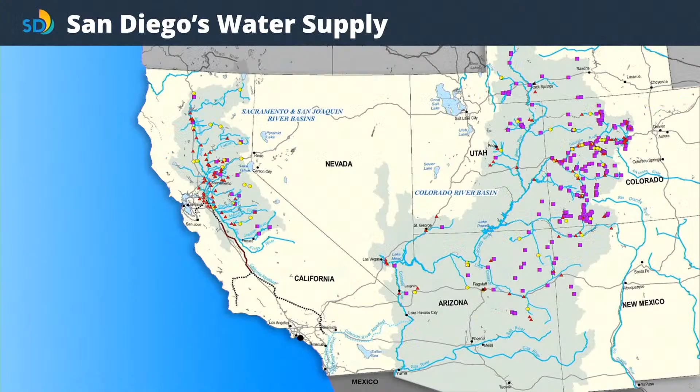I'm Michael Valori with the City of San Diego and Pure Water, and I'm just going to jump right into the presentation. Bear with me in case it's a little clunky. I'm not too familiar, I might ask Marissa for help with the technology. Okay, thanks, yeah, that's it, you just hit that side of the thing. I think the space bar should work too. All right, I just wanted to give her a good moment to shine. So yeah, thank you, all right everyone.

We start with this slide because it's one of the most important things we want everyone here to leave with thinking about: this idea of reusing water, water that's been used by others, whether it's industry, municipalities, or tribes on the reservations—we use it again. As you see here, we get water from the north, from the Colorado River and also from the Sacramento River Basin.

These areas are where rain collects and drains all the way down to San Diego, all the way at the south, where that water drop is.

Throughout that journey, both of these streams collect water from all those purple, yellow, and red spots. Those are all agencies and cities and villages and other people. So this idea of reusing water that was used for centuries and millennia is, time and time again, not new.

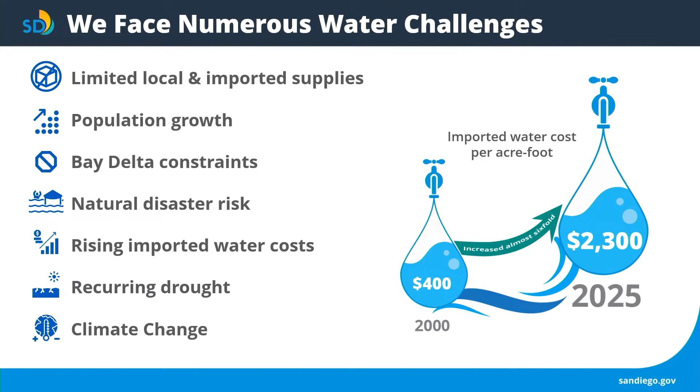With water in mind, another thing you've probably heard a little bit about is desalinization. That's using ocean water. It's a great idea, it's a great big source. It's also very, very hard to do and very costly. That water is salty, incredibly salty, and the equipment takes a beating.

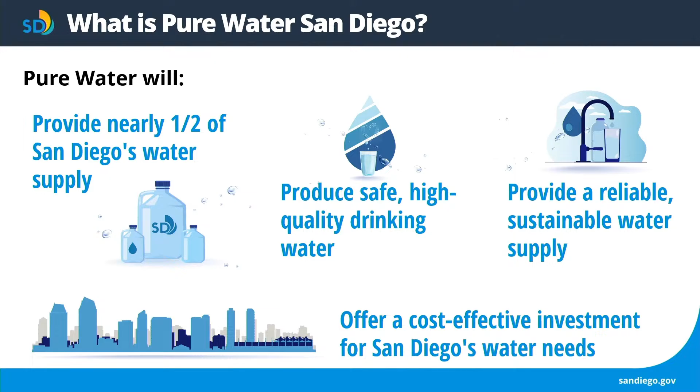And most importantly, offer a cost-effective investment for San Diego's water, whether it be potable use, industrial, or agricultural. It's going to be a cost-effective method. We can't keep relying on those upstream retailers - you saw how much the water increased over the past 20 years. It's not sustainable.

We send it to the drinking water plant, treat it, and then it comes to us here at the faucets, our toilets. Once treated, we send it just to the ocean. It's treated to a safe level, and sent back out, but we don't get it back, we don't benefit from it, and that's it.

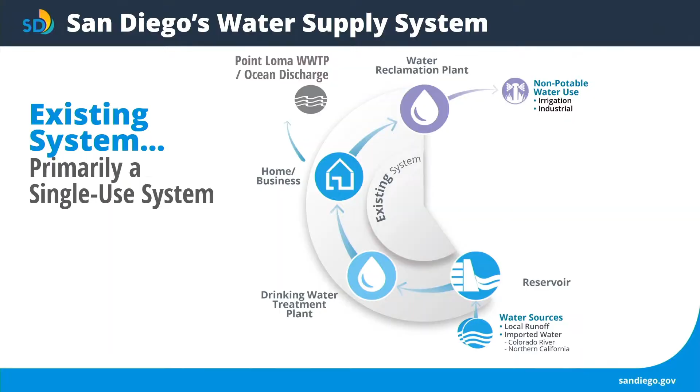Also, one thing I mentioned last is the purple pipe, that's water reclamation. We're doing a little bit of recycling currently. But what Pure Water is going to do is close the system. So instead of taking more water from the bottom sources and sending more out to Point Loma and the ocean, we're going to cut off those two a little bit and keep it running inside, basically a closed cycle. So instead of draining to the ocean, we're going to use it again, after treating it to incredibly healthy levels.

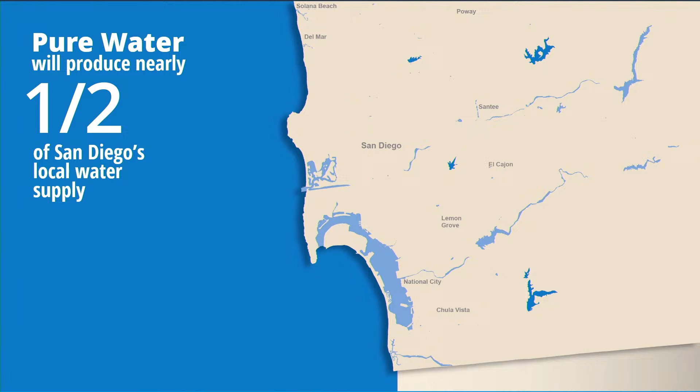That's the Pure Water facility, and we're going to talk a little bit more about that now. As I mentioned in one of the previous slides, San Diego Pure Water will produce half of the local water supply.

Right now we're finishing up, well we still have a year or two, but as far as it's come we consider it finishing up Phase 1. You can see this shows Phase 1. Roy's going to talk a little bit more about these locations, but we take water from Morena Pump Station, send it up to North City Water Reclamation and Pure Water Facility, and then it goes to Miramar Reservoir. So if you remember the past slide with the reservoir where it starts, this is actually where, if you think about it, we're starting back again.

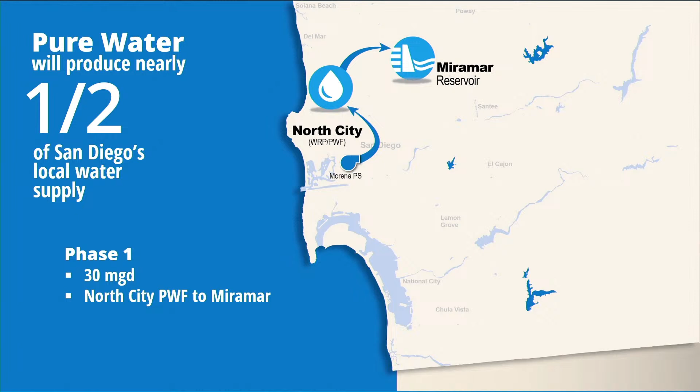Phase 1 is going to produce 30 million gallons per day. I know that number doesn't mean so much, but it's a big number, it's a lot of water.

And now I'm going to show a presentation, a video of the demonstration facility. Instead of going there, we like to show this video. I think it's about 10 minutes, and it's also available on YouTube if anyone wants to send this out to friends or family.

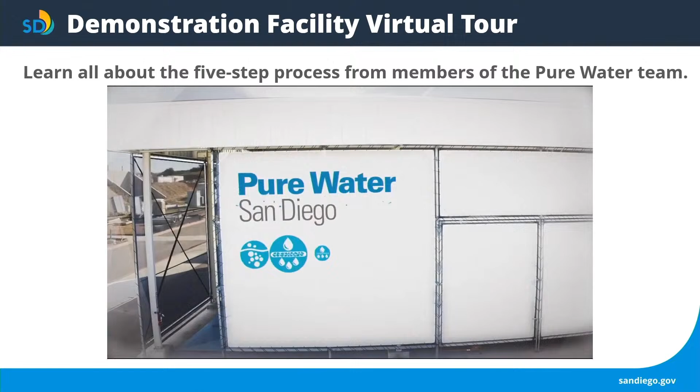Welcome to the City of San Diego's Pure Water Demonstration Facility. This facility is a key element of the San Diego Pure Water Program, which will provide half of the city's water supply by 2035. The Pure Water Demonstration Facility uses advanced technology to treat recycled water to meet drinking water standards.

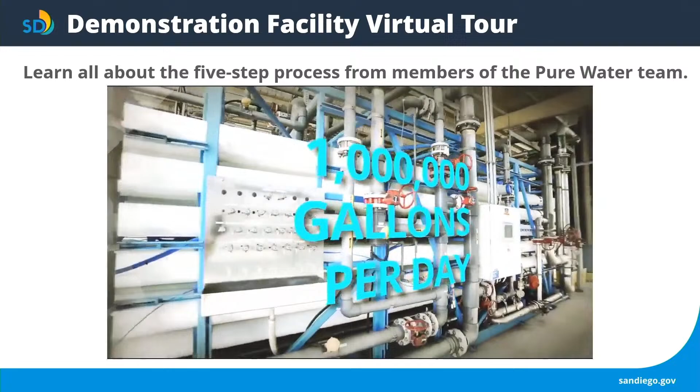This facility, here since 2011, has produced over 1 million gallons per day of purified water that is used for monitoring and testing. The results of this testing, combined with input from scientists, health experts, and outside laboratories, has shown that it is a safe new water supply for the City of San Diego.

We're pleased to have you join our engineers, operators, and other staff associated with the Pure Water Program on your virtual tour of these facilities today. Phase 1 of the Pure Water program, which includes a full-size treatment facility, pipelines, and pump stations, has been designed and construction is well underway.

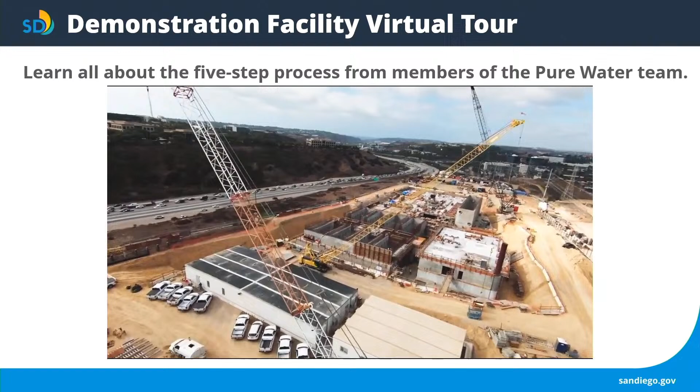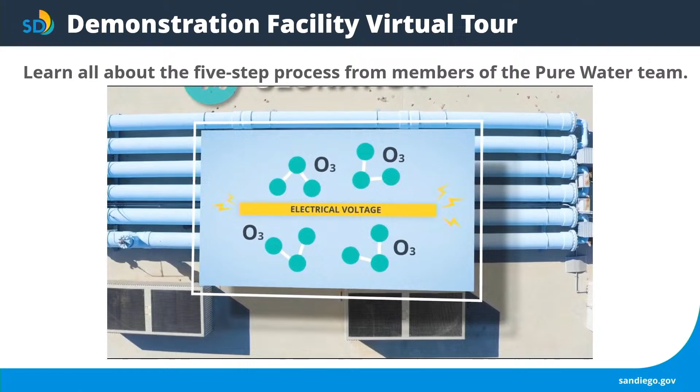The first step of San Diego's water purification process is called ozonation. Ozone gas is a powerful oxidant and is generated here on site by subjecting oxygen molecules to a high electrical voltage, converting O2 to O3. That's done by specialized equipment that's inside of the white metal container back there.

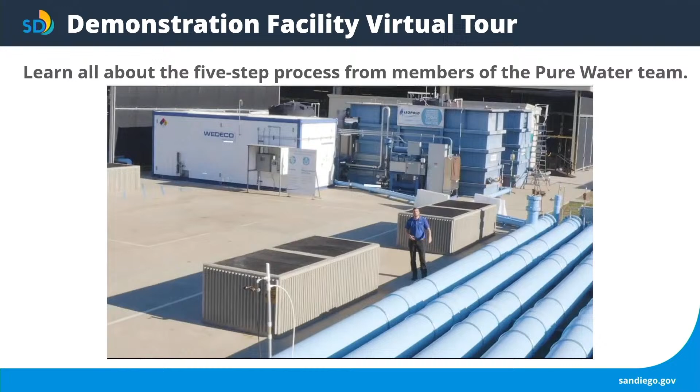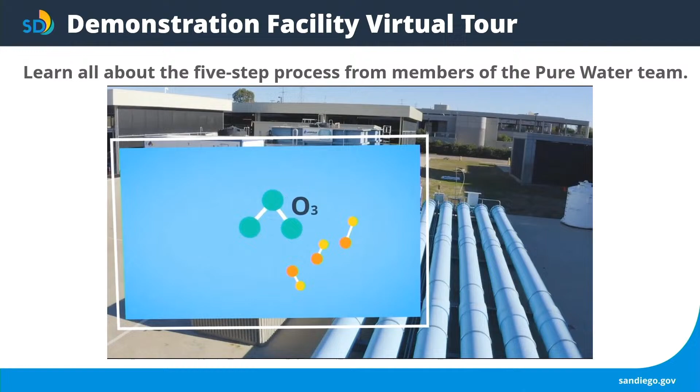That gas is then infused in the water and carries through a series of blue pipes called the ozone contactors. The contactors provide time in which ozone can react with constituents in the water. Ozone is very reactive and it'll break down pathogens that cause us harm by destroying their outer cell walls. It can also break down other smaller molecules to more basic forms. It takes about 8 minutes for the water to pass through this process.

The second step is the biological activated carbon filters. By the time the water reaches the filters here, all the ozone in it will have either been consumed or broken down to O2, its more stable form.

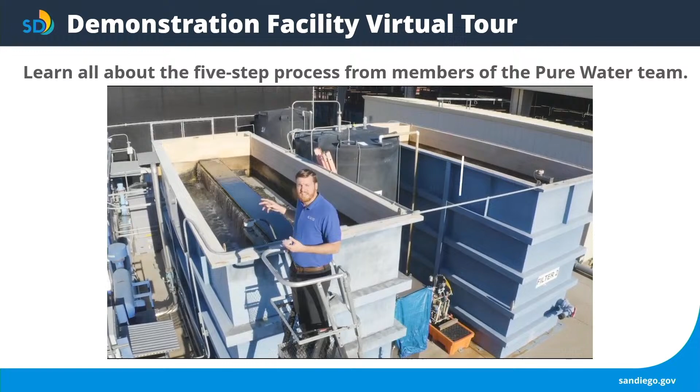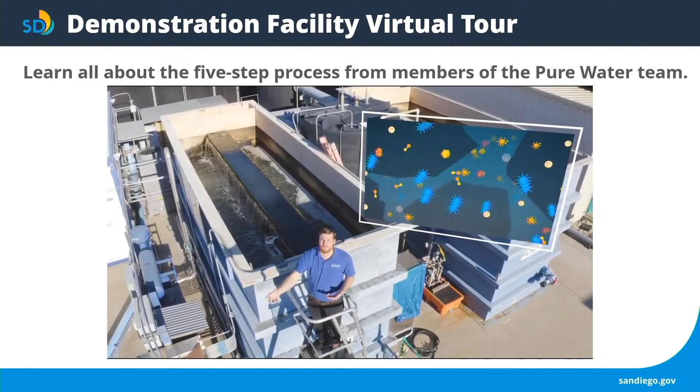Inside of the filters is a media just teeming with beneficial bacteria. These bacteria consume the organics that were broken down by the ozone process. We get about 30 to 50% removal of organic matter from this process. The beneficial bacteria are then removed at the next step along with anything else that gets through the filter.

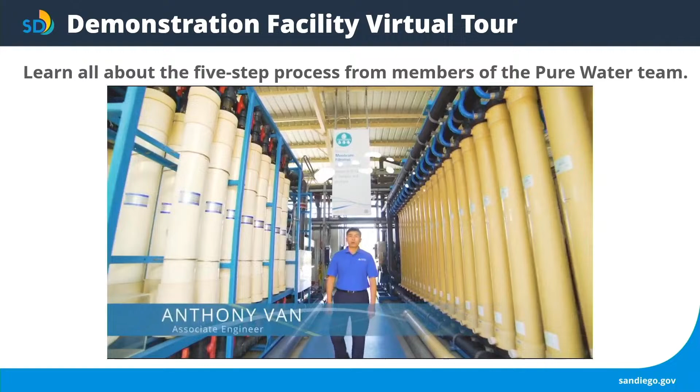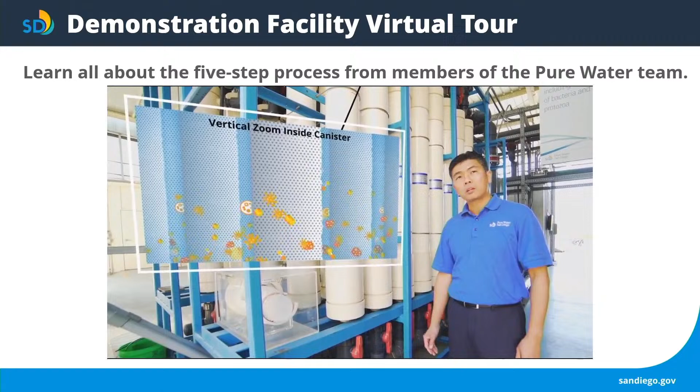And here we are at the third barrier of the water purification process. It's called membrane filtration. At this stage, recycled water is pushed by high pressure pumps through filtration membranes made up of thousands of hollow fibers. These fibers have very fine pores that filter out particles, bacteria, and protozoa in the water.

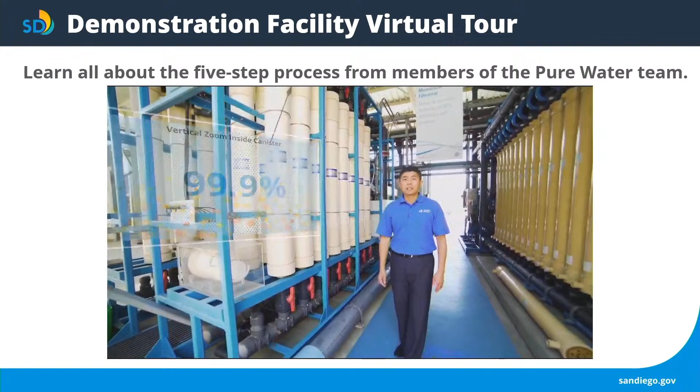99.9% of the particles cannot pass through this process. We're testing two types of membranes. On the left is the ultrafiltration. On the right is the microfiltration.

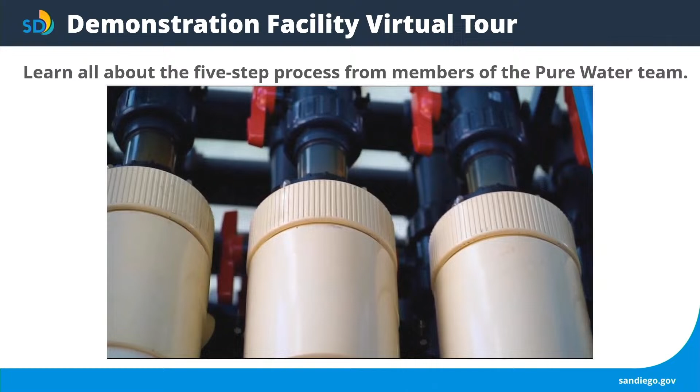The difference between these two types of membrane is that ultrafiltration takes out additional organic matter, but it also operates at high pressure and requires more energy to do so. 1 million gallons per day of water passes through these two equipments. 500,000 goes to the ultrafiltration and the other half goes to the microfiltration.

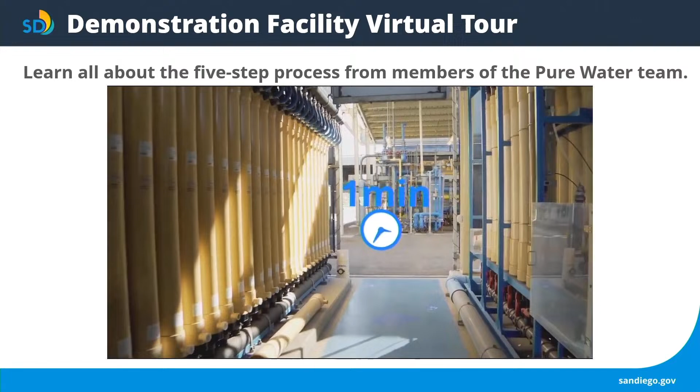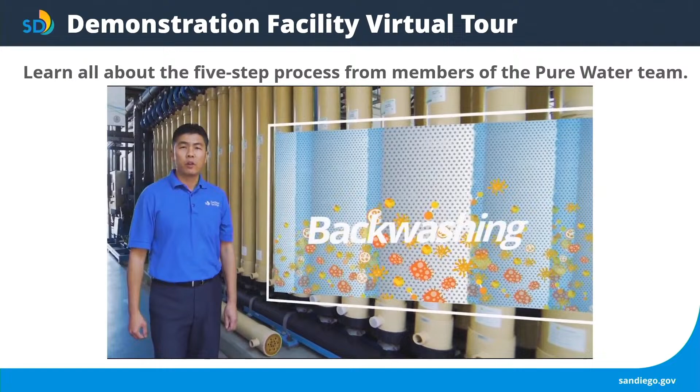All membranes are tested and monitored daily to confirm the integrity of the membrane filters. It only takes 1 minute for water to pass through these membranes. To prevent particle buildup on the membrane fibers, a process called backwashing occurs every 30 minutes. Backwashing reverses the flow of water and uses air scouring to shake off any particle buildup on the membrane fibers.

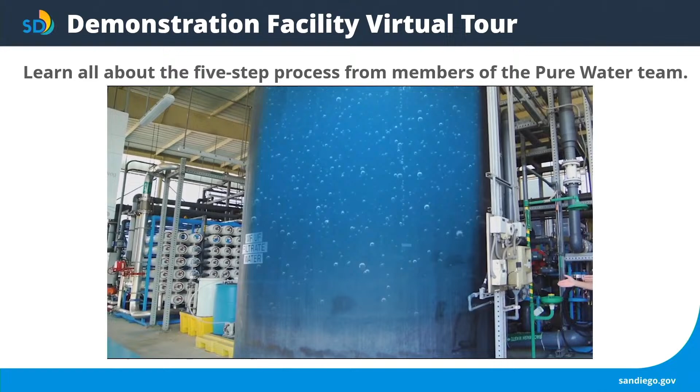As the water gets processed through the membrane filtrations, it comes together here at this 15,000 gallon storage tank where it is ready to get processed and move on to the next barrier, called reverse osmosis.

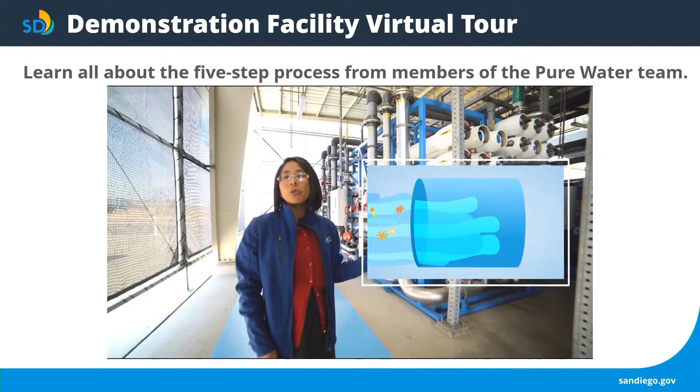Okay, now for reverse osmosis. So reverse osmosis is an extremely powerful treatment technology. It's able to remove 99.9% of what remains in the water after it's already gone through the 3 steps you've already seen. And we are actually testing 2 types, 2 configurations, and 2 manufacturers.

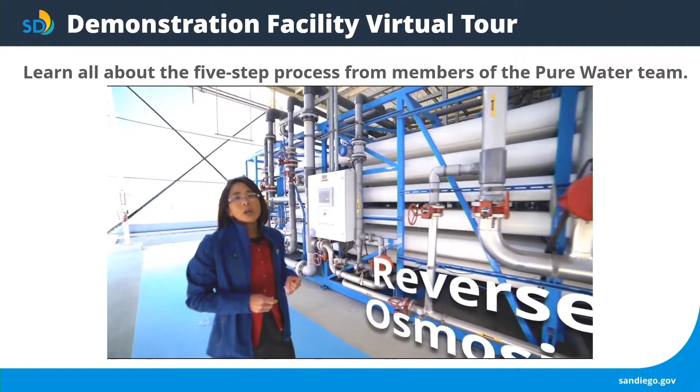The reason we did this is we wanted to be able to compare the performance of the membranes, how much removal we're able to get, and also be able to measure the energy consumption since this is an intensive treatment step.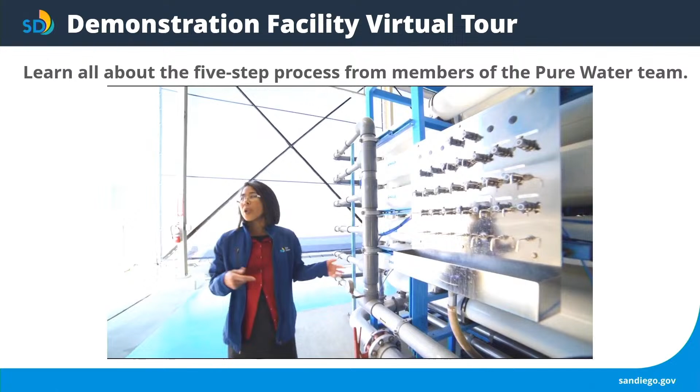Similar to the membrane filters and the other processes you've already seen, we're constantly monitoring the water as it enters and exits the RO membranes. We want to make sure that we're getting the removal of the dissolved salts and the dissolved organic compounds that we expect.

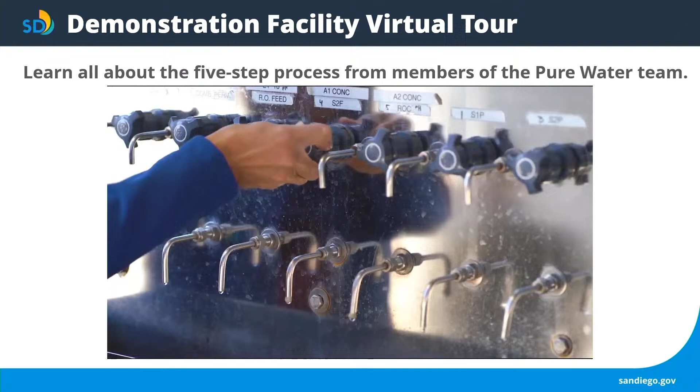The way we do that, our operators pull samples from ports like these throughout the day. Each one of these is plumbed to an individual canister of membranes. So we take the water and test it for temperature, electric conductivity, and other parameters just to make sure that the membranes are working properly. So if you follow me around the corner, we'll show you what they look like.

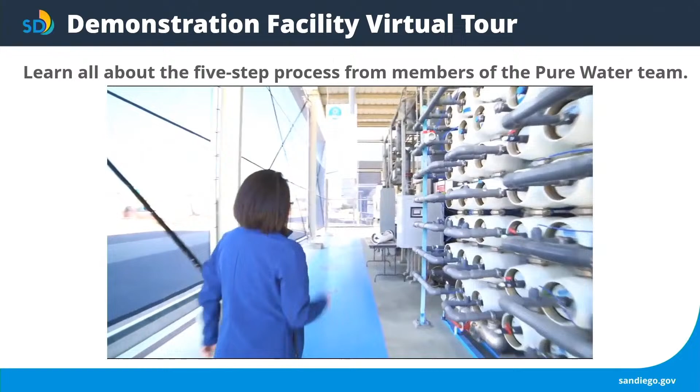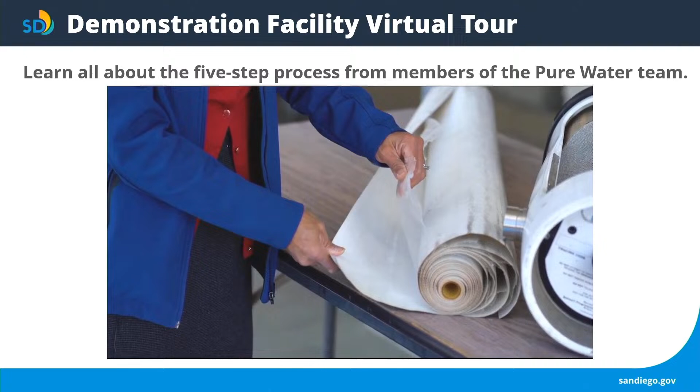So the membranes are actually these plastic sheets, and they're rolled in consecutive layers similar to a roll of paper towels. So you have the membrane, and in between you have this netting. It acts as a spacer. And so how it works is it's tightly wound.

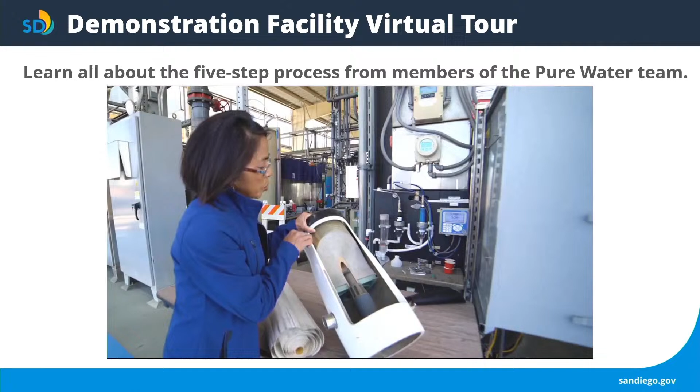The water is forced under pressure on the outside of the canister, and it makes its way through each layer of the membrane. The dissolved salts and organic compounds that we want to remove from the water get trapped in between the sheets, and they're forced out the ends of the canister. They're not allowed to continue on in the process, so all that makes it through is the filtered water that gets to the center of the membrane, and this is what goes on to the next step in the process. And there you have it - that's reverse osmosis.

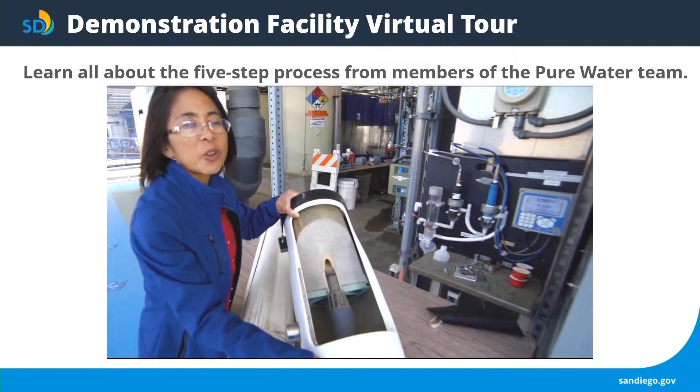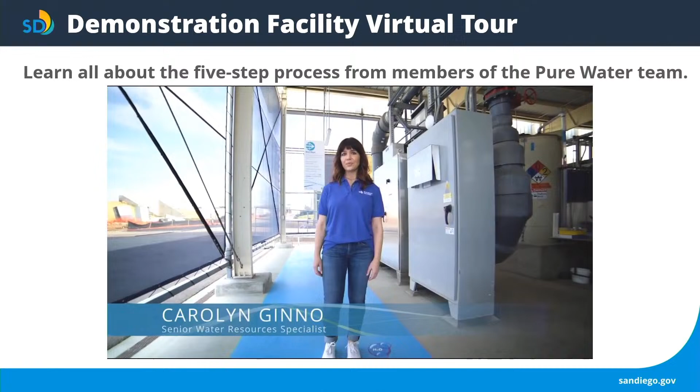We are now at the fifth and final barrier of Pure Water Demonstration Facility, Advanced Oxidation with Ultraviolet Light. When the water leaves the reverse osmosis units, a powerful disinfectant is injected into it. This unit right here produces ultraviolet light, which is similar to extremely concentrated sunlight. There's actually 72 bulbs just like this wound up inside of the unit. When that ultraviolet light hits that disinfectant, powerful reactive molecules are formed, which actually destroy any matter that happens to be left in the water at that point.

It's so powerful and so fast that in just 1 second, 99.9999% of all protozoa, bacteria, and viruses are all destroyed. This process also helps to ensure that no new matter is formed in the water going forward. And after this step is finished, we have purified water.

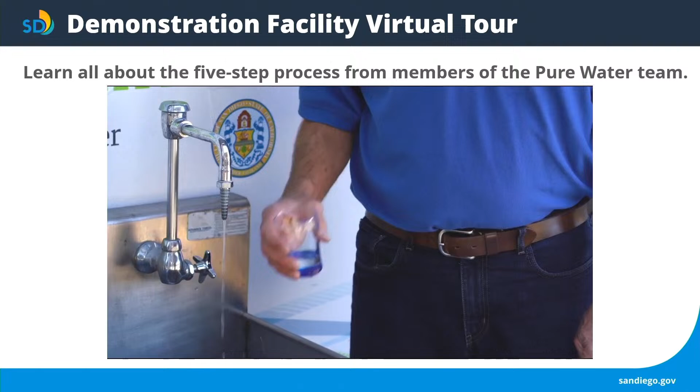Now that the water has gone through the 5 treatment steps that you've seen, the water is pure and distilled water quality. The water produced at this 1 million gallon per day demonstration facility is tested to ensure that it meets all drinking water standards. As you can see, the water is pure, just as pure as the water that comes from the tap in your home. In fact, it's so pure that we'll have to add minerals back into the water before we pipe it to Miramar Reservoir.

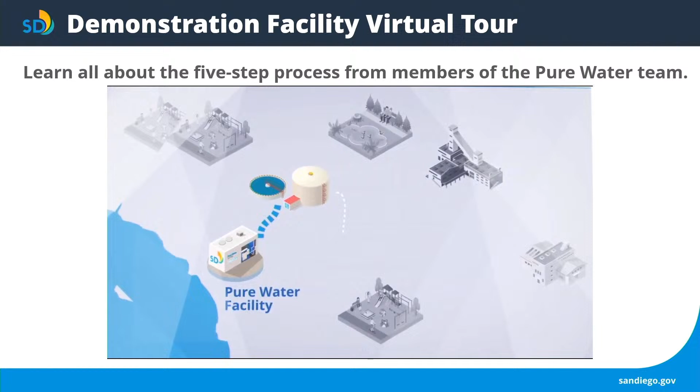The water produced here at the demonstration facility is being returned to the recycled water system for irrigation and industrial uses. Phase 1 of the Pure Water program will construct a 30 million gallon per day full-scale facility, 30 times larger, that will use the same technology that you saw here in the demonstration facility.

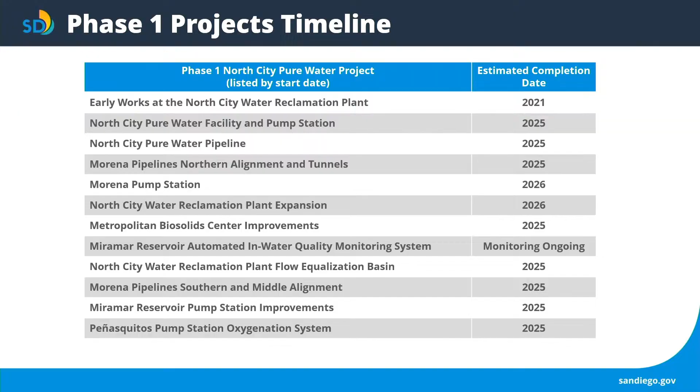I'm not going to get into too much detail about the timeline here. This is an overview of the 12 major projects that are under construction as part of Pure Water Phase 1. A number of these projects started construction as early as 2019 and 2020. As you can see from the estimated completion date, most of them are set to be completed later this year, with some other major projects set to be finished in construction next year. So as far as Phase 1 goes, we were pretty far along in construction. We can see the light at the end of the tunnel now.

We're almost complete. And just to give you guys an idea of scale of these projects, we have some construction projects that are as small as $1 million for construction and some as large as $350 million in construction. In total, the Phase 1 program estimated cost is about $1.5 billion to design and construct and to deliver.

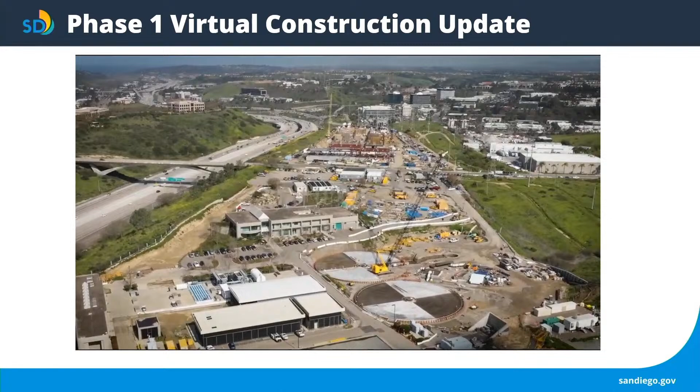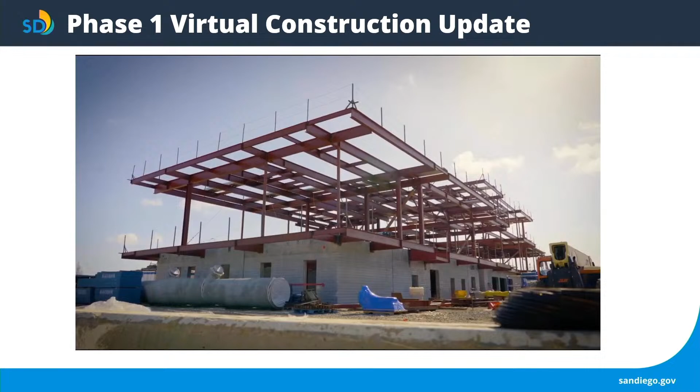Pure Water San Diego is the city's largest infrastructure project to date, and we're making tremendous progress on the construction of Phase 1, which will deliver 30 million gallons of water a day. The program offers a cost-effective investment for San Diego's water needs and will provide reliable, sustainable water supply for generations to come.

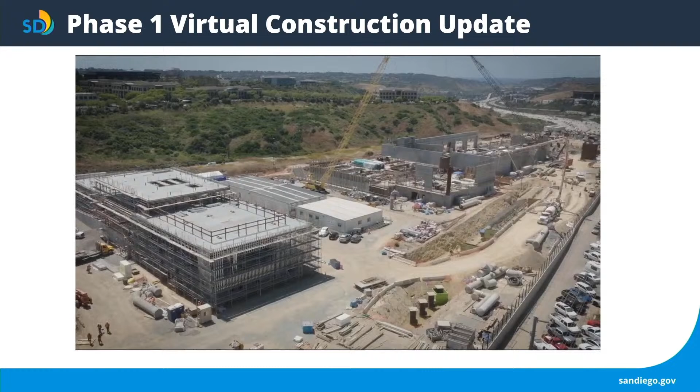Pure Water Phase 1 includes 10 major interconnected projects in the Morena, Bay Park, Clairemont, University City, Miramar, and Scripps Ranch communities, and construction's underway or completed on all the projects. To fund Phase 1, the city has been diligent and tireless in pursuing and securing as much federal and state funding as possible. To date, the city has received more than $1.4 billion in low-interest loans and $81.5 million in grants. Here's an overview of the Phase 1 projects.

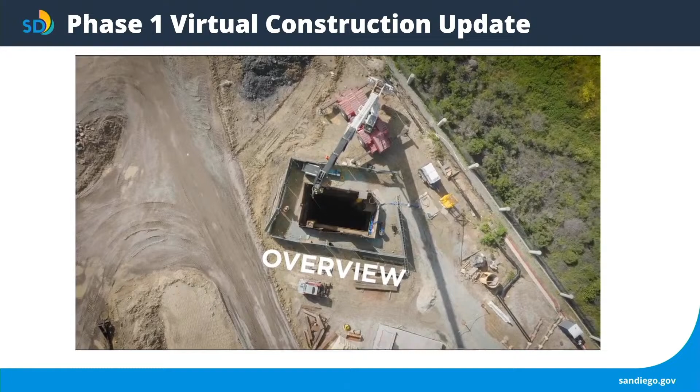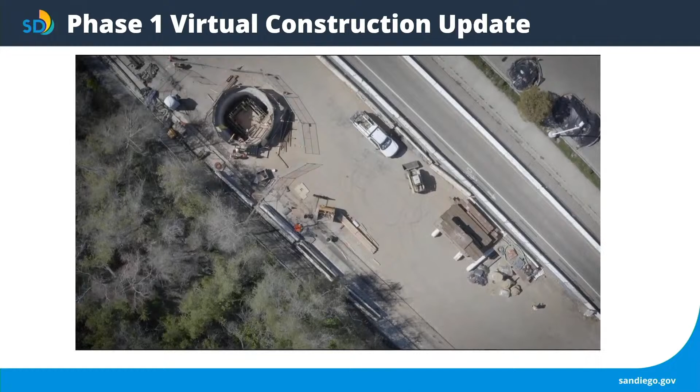Starting from the southern end, the Morena Pump Station will divert an average of 32 million gallons per day of wastewater from the existing system that runs under Friars Road. In addition to the pump station under construction at Sherman and Custer Streets, this project also includes a diversion structure and a junction structure under Friars Road.

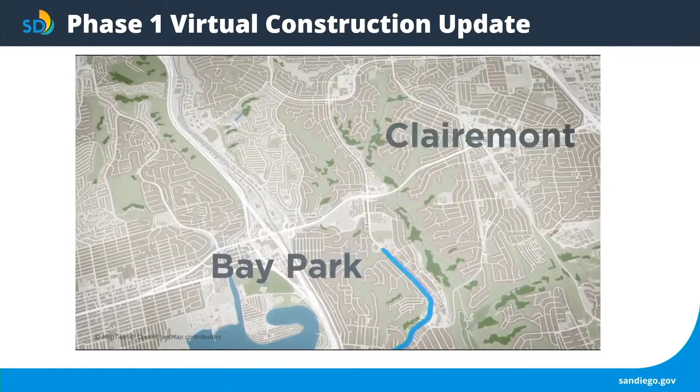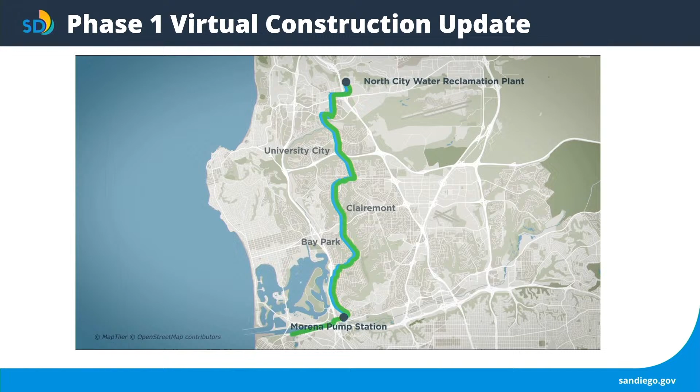Once wastewater is diverted from the Morena Pump Station, it will travel through a 10.5-mile wastewater pipeline through Bay Park, Clairemont, and University City. The facility projects will be connected by 2 pipelines under construction: one to carry wastewater to the North City Water Reclamation Plant, and the other to carry the byproduct, or the remaining product from the water, to the Point Loma Wastewater Treatment Plant.

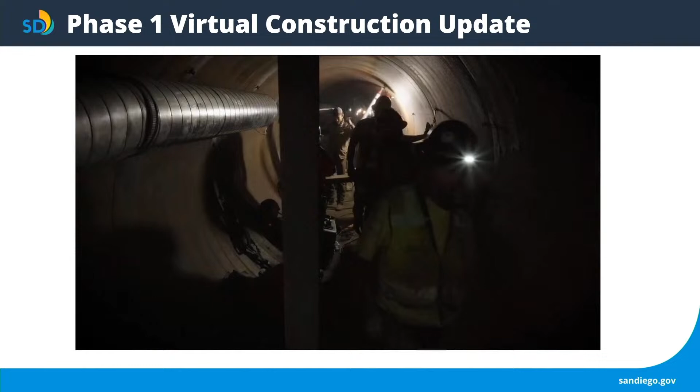Projects of this scale involve technical construction and high-tech equipment that requires experienced operators. While most of the construction will include trenched installation, tunneling with specialized machines will be completed in 3 areas, including under Interstate 805 to connect the pipelines with the existing North City Water Reclamation Plant.

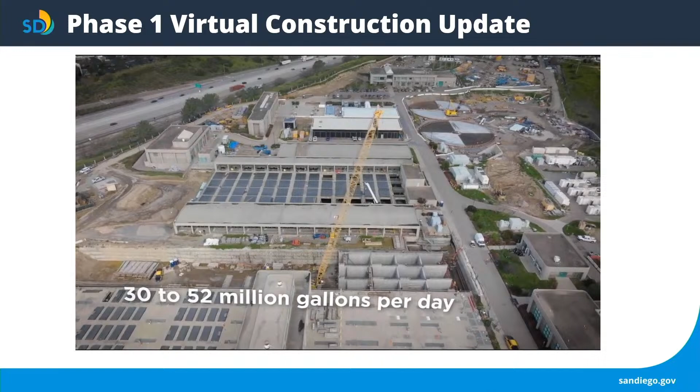The wastewater will be cleaned to recycled water standards at the North City Water Reclamation Plant on Eastgate Mall, which is currently being significantly expanded from 30 million gallons per day to 52 million gallons per day. The recycled water will then be transported across the street to the North City Pure Water Facility, where it will go through a rigorous 5-step purification process.

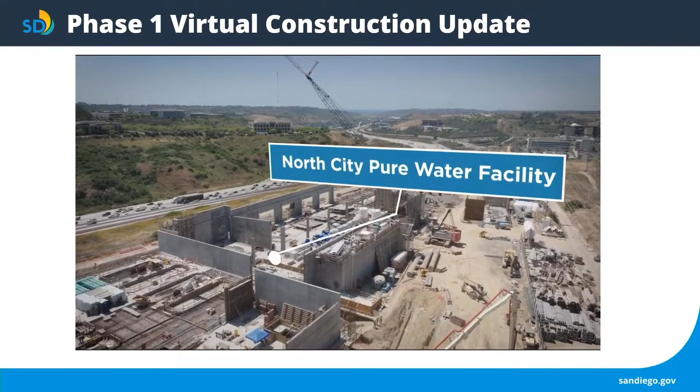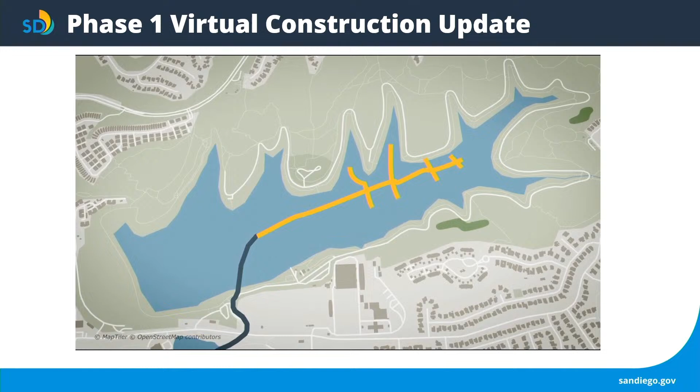Once the high-quality purified water leaves the Pure Water Facility, it travels to Miramar Road eastward through an 8-mile pipeline under Interstate 15 and into Scripps Ranch, where the purified water will pass through a dechlorination facility in preparation for storage in Miramar Reservoir. The purified water will enter the reservoir through a 1-mile branched underwater pipeline and mix with water in Miramar Reservoir.

This pipeline will be submerged and installed by divers. As with all our City of San Diego drinking water supplies, purified water in the Miramar Reservoir will be further treated at the nearby Miramar Water Treatment Plant before we deliver it to our customers in the northern part of the city. Now let's go check out the construction at the North City Pure Water Facility.

Welcome to the brain of the Pure Water Phase 1 project, the North City Pure Water Facility. This is the largest of all major Phase 1 projects with an estimated cost of $365 million. Behind me, the construction crews are making progress on concrete above-ground walls and other structural components of the purification process building and the structural steel framework of the operation and maintenance building.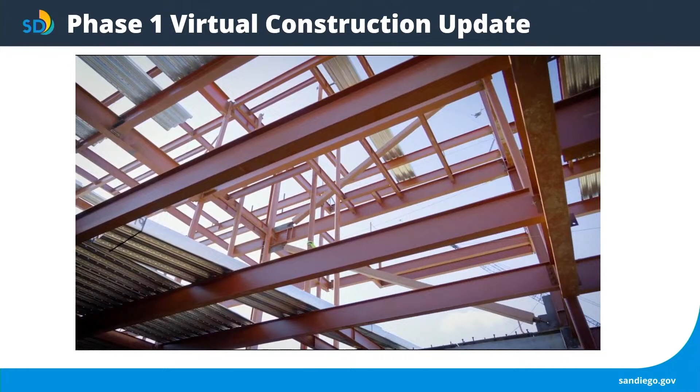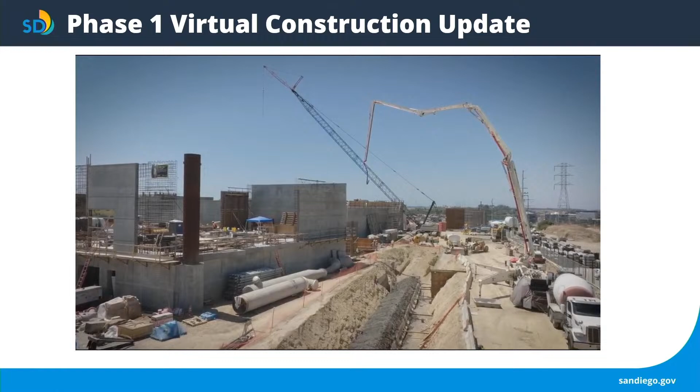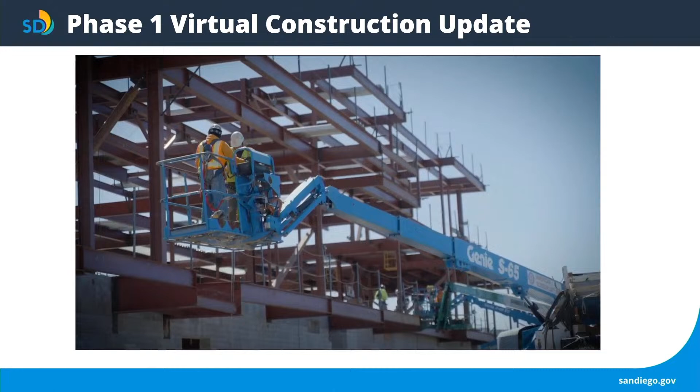Nearby, construction is underway on pump station and 4 pipelines that will connect the North City Water Reclamation Plant with the Pure Water Facility. Construction started April 2021, and most of the foundation and underground work, like piping and duct banks, is already complete. In addition to the water purification process buildings, this facility will also feature a new LEED Silver certified 33,000 square foot operations and maintenance building with workspace and a discovery center for the community to learn more about Pure Water San Diego and a sustainable water future.

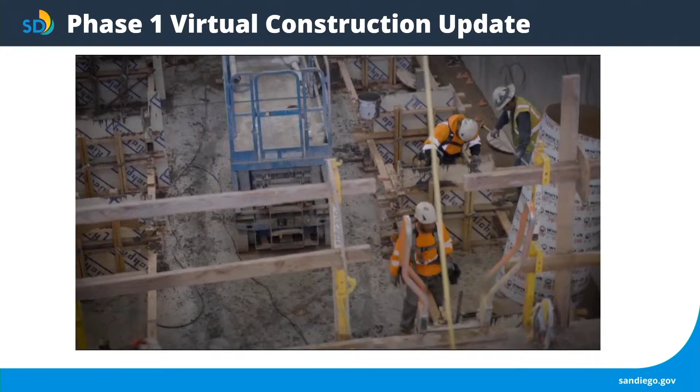Let's look at construction from above on the 5-step purification process. Here's the ozone building. Right now, crews are working on structural components like the upper level walls, mechanical components like plumbing, and electrical conduit installation. Underneath, the water goes through the ozone contactor. As you can see, the walls are complete and crews are working on the lighting conduits.

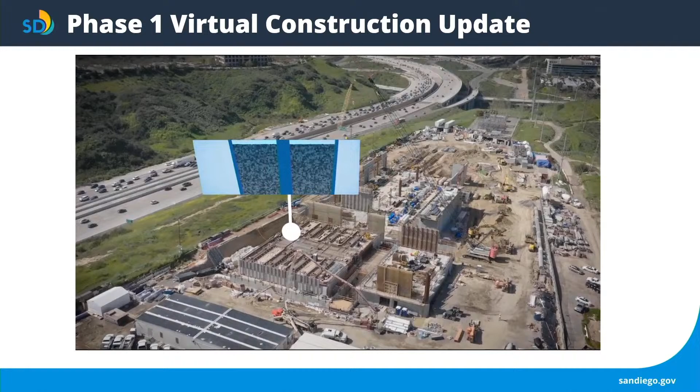The water then passes through the biological activated carbon filters, or BAC. Here at the BAC system area, crews are working on stairs, walls, and roof deck rebar installation. Next, the water goes to the membrane filtration feed tank, where crews are working on the tank structure and decking.

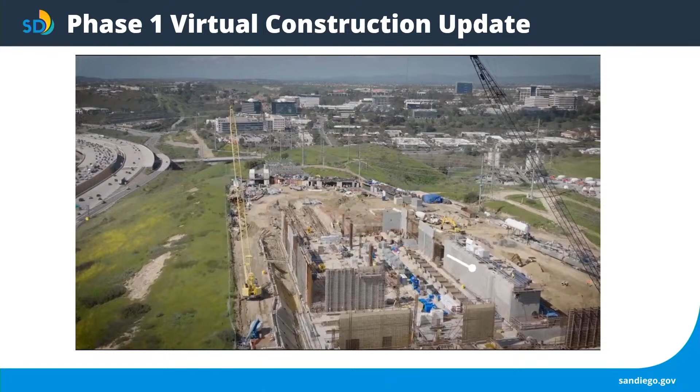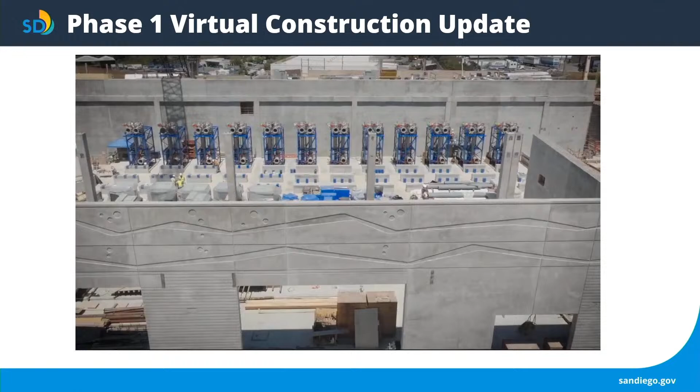Here you can see the multi-level process building that will eventually house the membrane filtration and reverse osmosis equipment. Crews are working on pipe installation throughout the basement level and walls on the ground level. This is also where the water will undergo UV light and advanced oxidation, the last step in the purification process.

As you can see, North City Pure Water Facility includes many different areas under construction simultaneously, all tightly orchestrated on this 10.5-acre site. The crews are what makes it happen here. Creating local jobs and putting San Diegans to work is a vital part of Pure Water San Diego. As of March 2023, program-wide, there are an estimated 2,022 people working on all the projects.

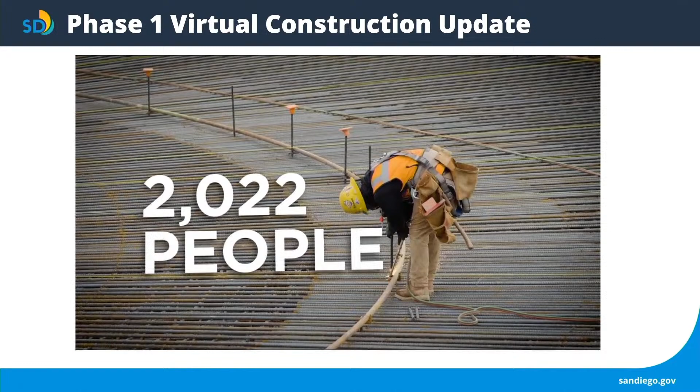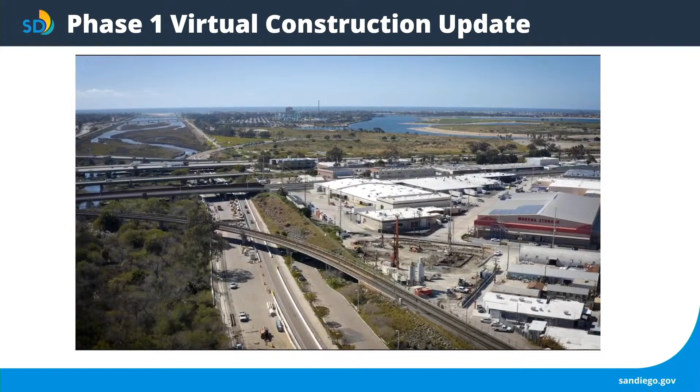1,330 of these are Pure Water San Diego construction workers that live in San Diego County, and 466 people that live within the City of San Diego. On this construction site alone, there are between 75 and 120 craft trade personnel working daily. We look forward to completing the Pure Water San Diego Phase 1 projects and making pure water a reality for generations of San Diegans through a local, drought-resilient water supply.

All right, I have some additional construction photos to show you all. This photo behind me is some of the open trench construction work that's being done as part of the Morena Conveyance South and Middle project. So this is the wastewater pipeline that's going to convey wastewater from Morena Pump Station up to the North City Water Reclamation Plant. This is some of the trenching work that the contractor was doing.

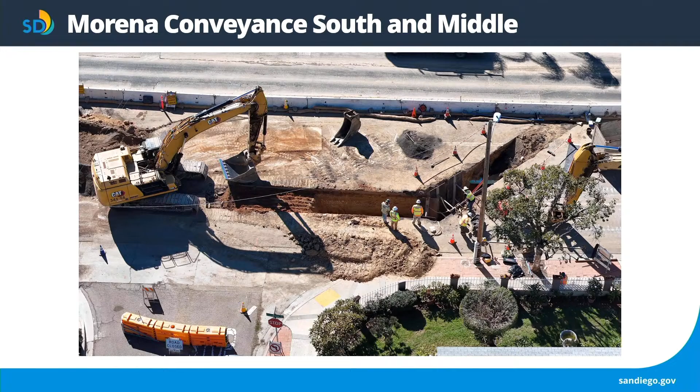You can see the footprint and sort of scale of construction. If you have been impacted by some of the traffic lane closures during construction, this is sort of the reason why. The equipment is very large, the trenching is deep and wide as well, and it's a large operation.

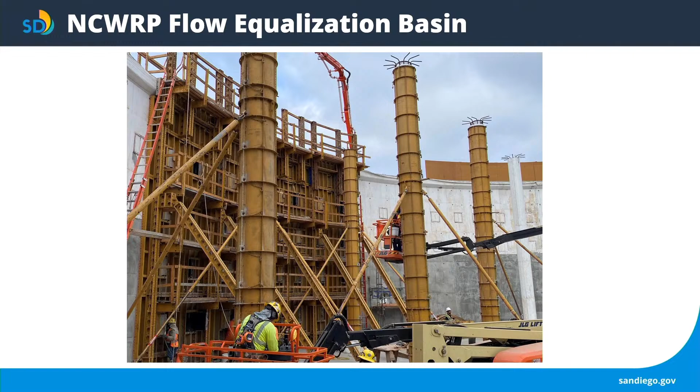Here we have a photo of the construction of an additional flow equalization basin at the North City Water Reclamation Plant. The flow equalization basin helps regulate the flow going into the treatment plant. Ideally, we'd like a continuous, steady flow rate. During high flow periods, the equalization basin fills up and stores the wastewater. During low flow periods, it drains out and adds additional flow to the treatment plant. This is necessary to ensure the treatment processes at the plant are functioning as they're supposed to.

And here's the Pure Water facility. You all saw that video previously showing a lot of the construction progress. This is a more recent aerial photo, the one on the right. Starting at the front is the very large operations and maintenance building and Discovery Center, which after construction is completed will be open to the public. There will be educational components and other exhibits to help the public learn more about the facility.

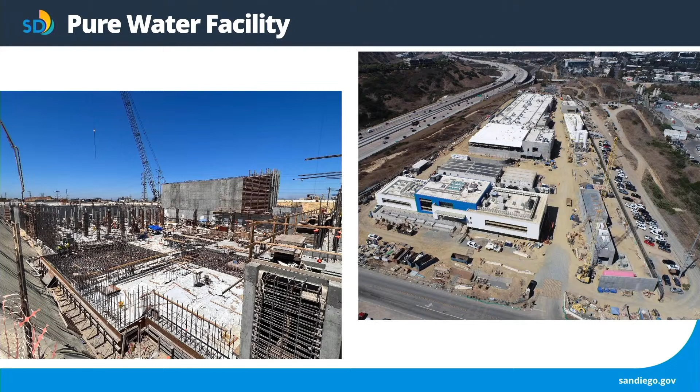Because the pipeline is empty as they pull it out, it floats. But as they pull it out onto the reservoir, they slowly fill it with water, and then it sinks. It's called an S-bend because it sinks from one end, forms an S shape, and slowly sinks down to the bottom. This pipeline has already been constructed. It's already at the bottom of Miramar Reservoir. This portion of construction is already complete.

Here we have the Miramar Reservoir Pump Station Improvements Project. If you've ever been to Miramar Reservoir, as you're walking around the loop, if you look down to the south past the dam, you can actually see these pumps there. These are the intake pumps for the treatment plant. They pull water from Miramar Reservoir and pump it into Miramar Water Treatment Plant so it has enough pressure to flow through the treatment plant for treatment.

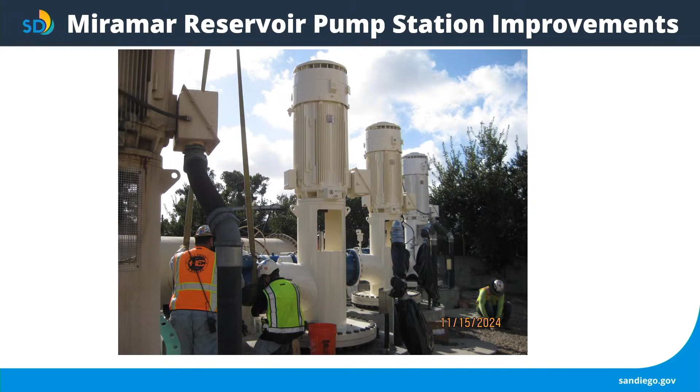Mike mentioned earlier that we're currently in the process of planning for Phase 2. Mike and I are working on Phase 2 planning components currently. We are looking at different options for where to place the Phase 2 facilities. We know it's going to be in the central area, but as far as where the treatment plant will be sited specifically, and where the purified water will be conveyed to, whether Lake Murray, San Vicente Reservoir, or a combination of the two, that hasn't yet been determined. We are looking at studies involving water balance between the reservoirs, water quality, and ease of operation. There are a lot of components we're currently looking at before we come to a decision.

And we have here a phase 2 small scale facility. This is the equivalent of the demonstration facility that's currently at the North City Water Reclamation Plant, which we had a virtual tour for.

As mentioned earlier, as part of the program, we have to demonstrate to state and other regulators that our treatment processes work, that we're removing the contaminants we say we will. That has been done for phase 1 already, but for phase 2 we're doing the same thing because our wastewater characteristics are a little bit different. We are testing new treatment technologies, so this small-scale facility is really important to test them, to run thousands of lab results, and to demonstrate to the regulators that what we're planning to do for phase 2 is going to work as expected.

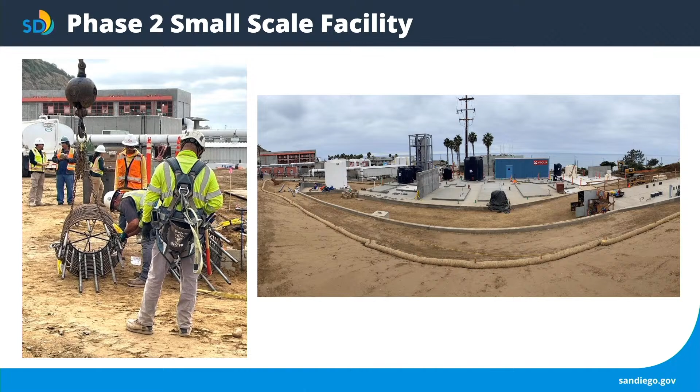So this one is going to be located at Point Loma Wastewater Treatment Plant. It is currently under construction. This is a project that Mike used to work on. It was fun, it was really fun. It's a beautiful location.

And sustainability is key for this program. The aim of this program is to provide the city with a safe, local, reliable, and sustainable water supply. I think that's been the theme throughout this whole presentation.